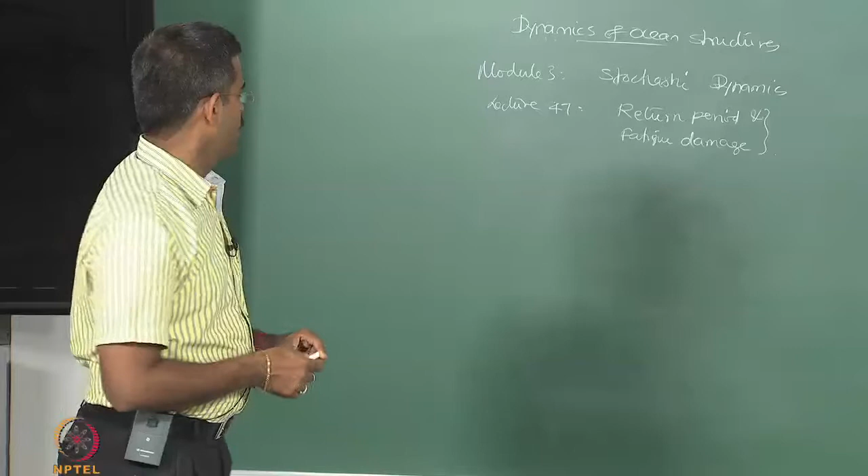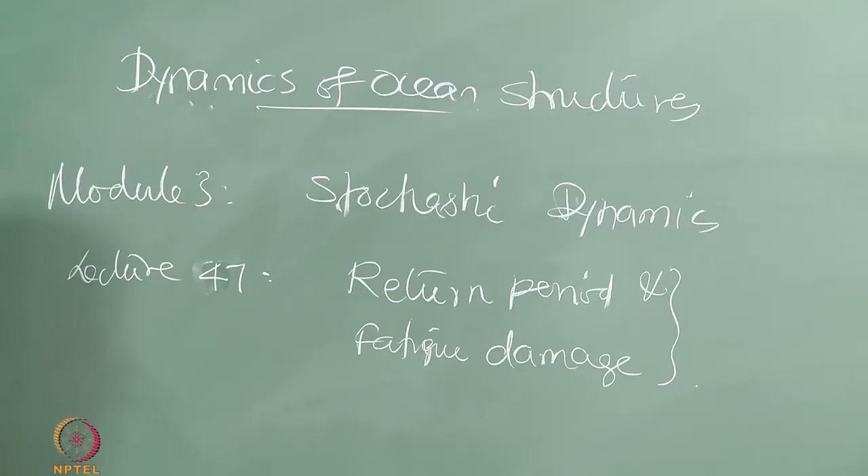So, we already discussed about the stochastic process, stationary conditions, ergodic, and the advantage of assuming the process to be ergodic. We have estimated the first order statistical properties for a stochastic process, and in the last class derived the connectivity between the load and the response, what we call a transfer function. We already said that the variance of the response is actually a function of the white noise, which is a modification of the input spectrum, which then depends essentially on

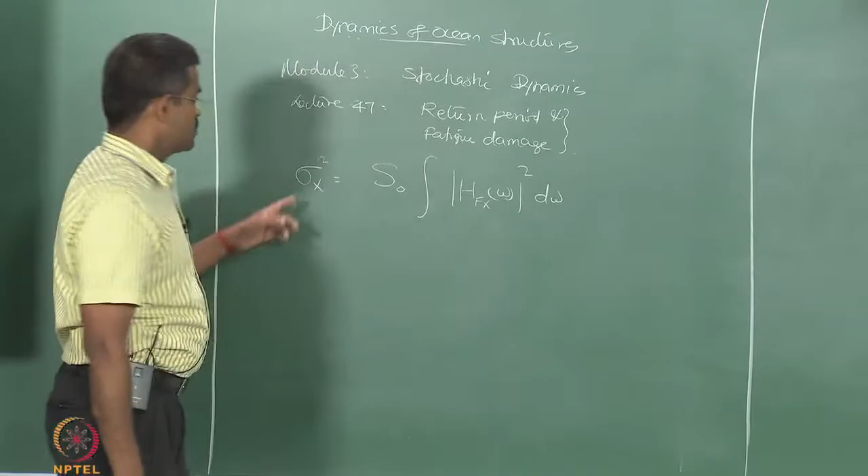a square d omega, and we already know that the response is a really narrow banded process for weakly damped system. For weakly damped system, response spectrum or response is narrow banded.

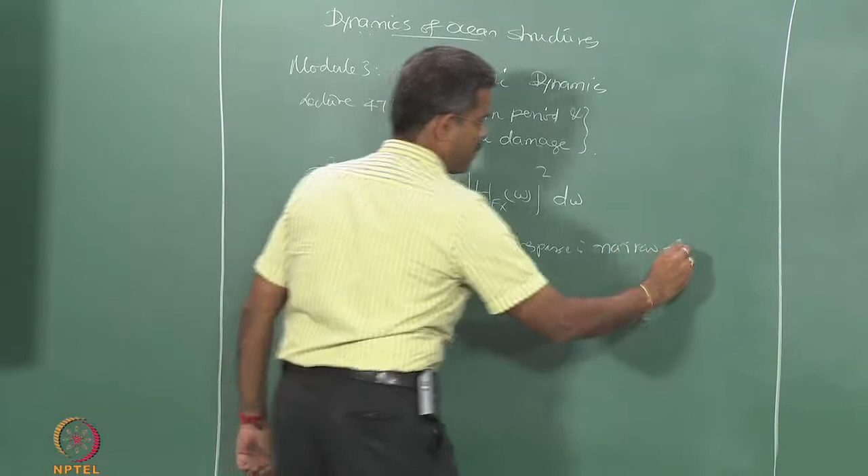It implies that it depends essentially on the transfer function, which depends on the ratio of omega, omega bar, and zeta, because transfer function is closely mapped to dynamic amplification factor, which is the ratio of the frequencies and the damping ratio in the given system.

So, essentially this conveys exactly the same meaning as that of a conventional dynamic analysis, where I do not bother about the statistical characteristics. I only bother about the input value in terms of its time history and try to find out the response either using modal response analysis, etc.

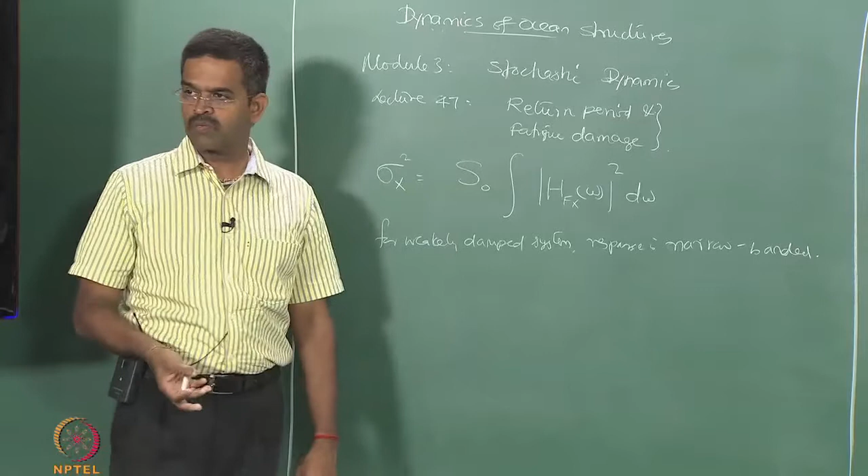I also have the similar meaning there, that the system response will be dependent essentially on the amplification factor of the system, which is a function of the ratio of the frequencies and damping present in the system. I also get exactly the same meaning in terms of physical understanding, even through a stochastic process, where we convey the same meaning, and we call this white noise approximation, where the input spectrum is modified, because the variation

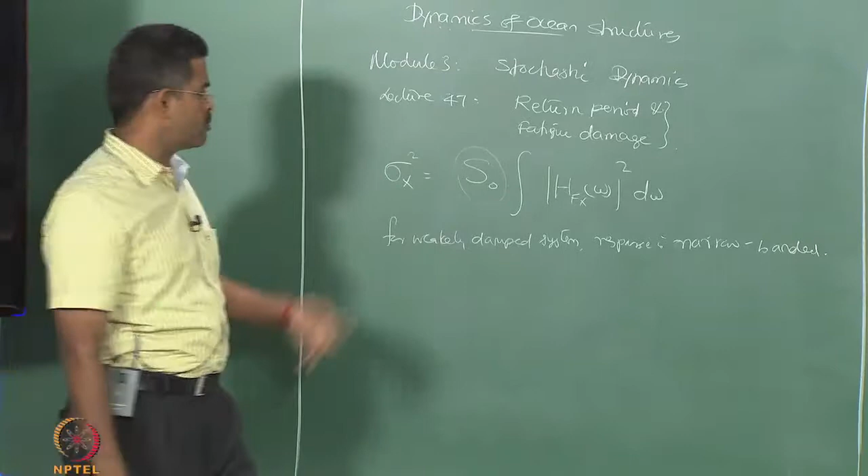of the input spectrum compared to that of the transfer function is not very sensitive. So, we capture the sensitivity of the transfer function and keep it out of the integral, and this integral is from 0 to infinity, or minus infinity to plus infinity, and so on. This is what we have discussed.

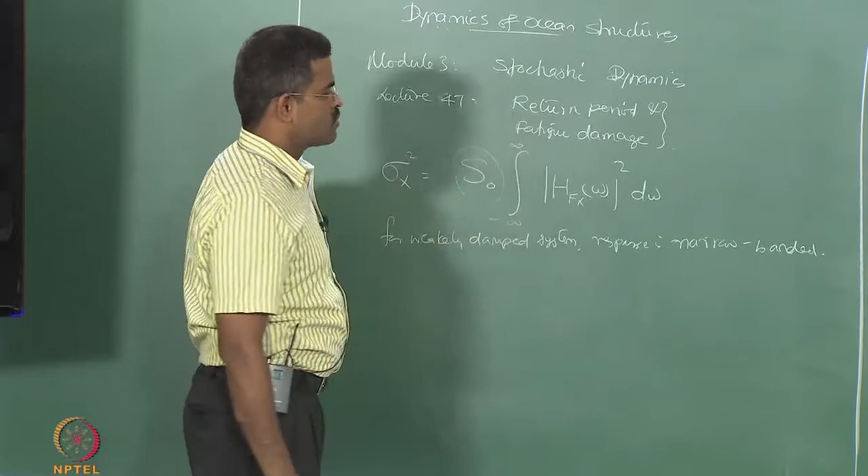Now, we will talk about the classical definition and understanding of return period. We already highlighted this partially in the first module, and we will recapture it again with the understanding of stochastic process. Then we will see how stochastic process can be useful for estimating the fatigue damage in a given system using linear approximation of cumulative damages.

Let us talk about return period now, because the moment I say return period, people have confusion about the reference period and return period. A lot of confusion is there. Return period can be expressed in three manners: one in the time domain manner, one in terms of the risk associated with return period, and the third could be a general definition of any value in a given set.

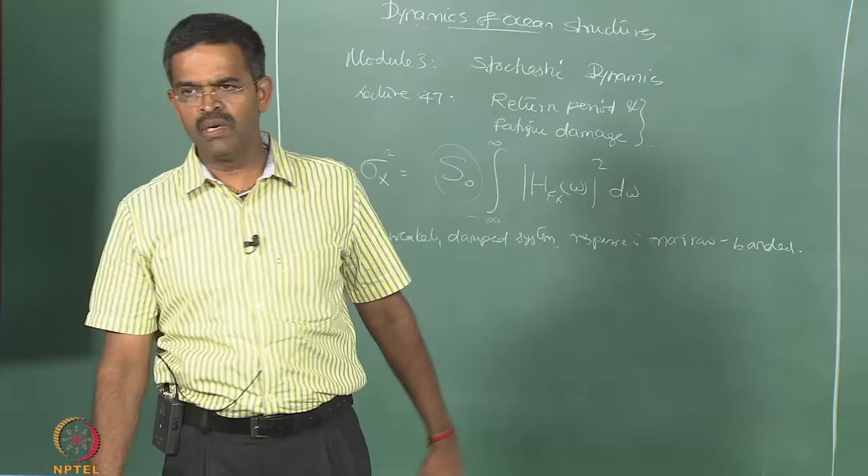Let Z be a random process. The random process, like we all understand, can be a wave height, wave period, stress value, bending moment, deflection, any value - let it be a random process. And I want to compare the value of Z of t with some threshold value small z, and I want to see what is the probability of exceedance of Z of t in a given set with that of small z. I want to see what is the probability of the value I am observing in a given system exceeding any pre-assigned, prefixed, predetermined value small z.

Then I will call that the period of exceedance. That is what we call the return period. Period of exceedance.

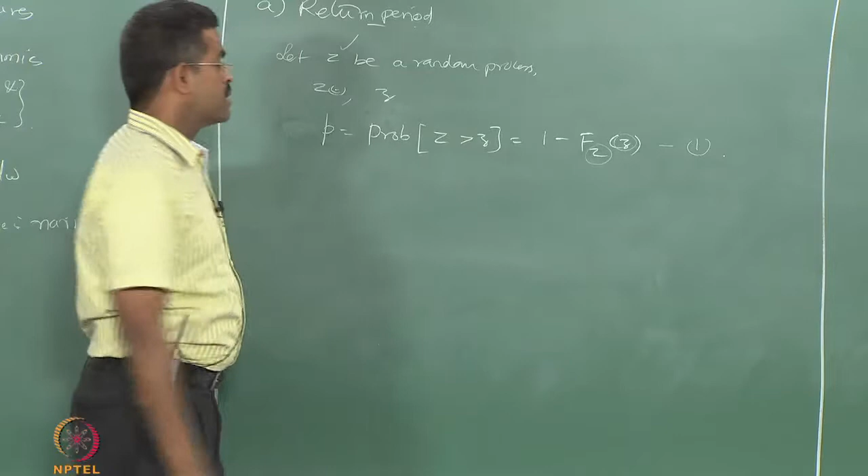Let that probability P be the probability of Z exceeding z, which is given by 1 minus F capital Z of z - that is the nomenclature. Z is the set of observation, z is the threshold value with which you are comparing. Equation number 1. So, the probability of exceedance of the value observed by you, which is actually a random process, by comparing it with some standard reference value - because when you say exceedance you have to compare it with some value. That comparison value is a fixed value, and you are observing a set of values which is randomly distributed, and the probability of that exceedance is expressed by this relationship.

Now, probability, or let us say exceedance of the observed value can be then stated as return period, which is R bar Z, which is 1 over the probability of this value, which is 1 by 1 minus F Z of z, equation 2. So, if you know this probability of exceedance, then you can easily find the return period, which is the inverse of this probability.

which is inverse of this, or inverse of this probability.

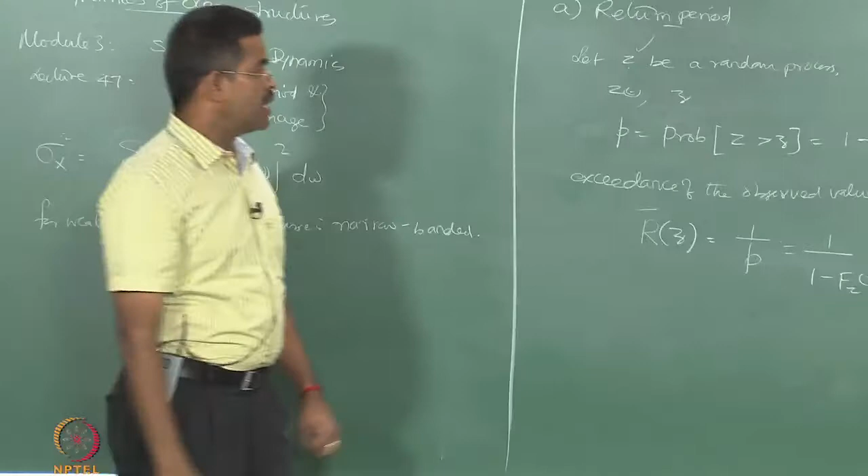Obviously, there is a very important factor here which people generally associate with return period. You have observed a set of values of z which is randomly distributed. There is a lot of uncertainty in recording z. One important factor associated with return period is at what intervals you have to record z, because the observation of z should be statistically independent.

So, to make any observation statistically independent, you have to have a sufficient delta t between the observations, where delta t is the interval between the successive observations, over a period of observation t. It is important to ensure that the interval between the observations should be sufficiently large to make the observations statistically independent.

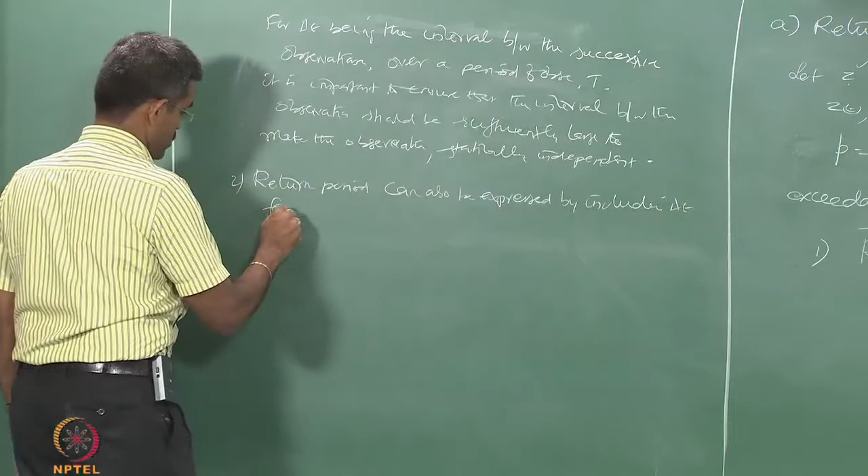So, in that case, the return period can be expressed. This is the second form of return period. The first form of return period is this one. Return period can also be expressed by including the delta t factor as given below.

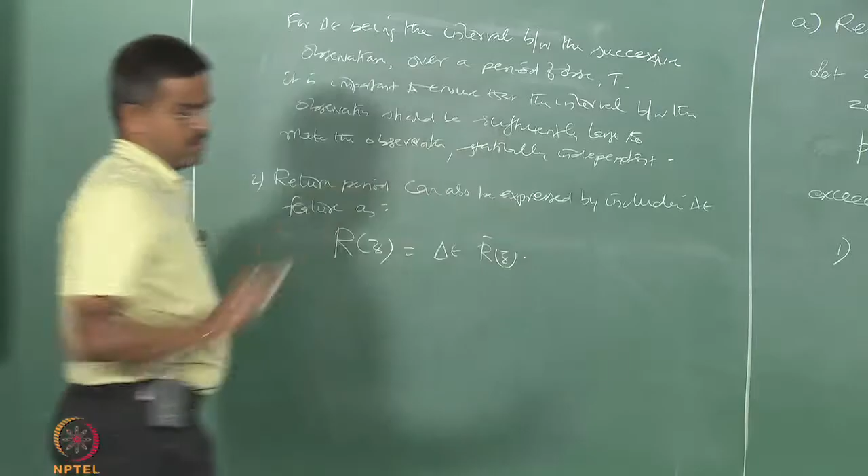So in this case we say that R of z, here it is R bar, here it is R, which is indicated as R bar delta t of z. I call this equation number 3. So this is also called return period, but this includes the feature of time interval between the observations.

Now we can also understand this with an example. Let us say in design of offshore structures, the design load, which is also a variable, is considered as a probable value of exceedance of 10 power minus 2 every year.

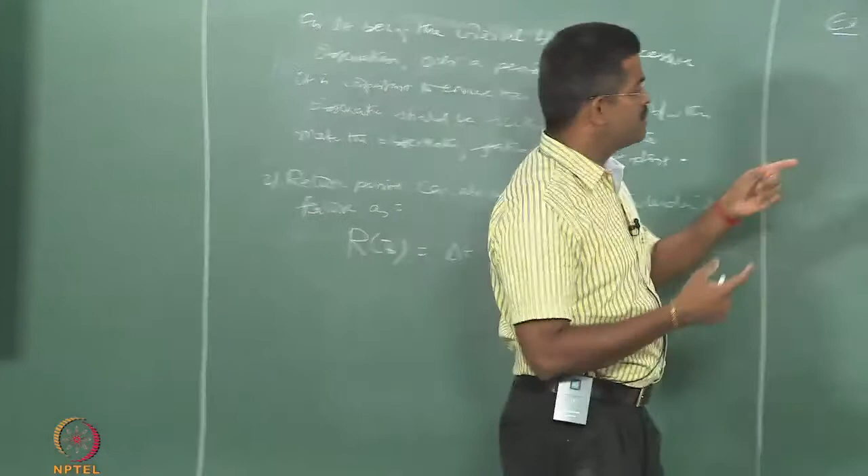What does it mean? 99% the design load what to apply to the design will not exceed. 0.01, 1% it will exceed, that is in every year. So there are two periods associated here. One, if we invert this, I get a probability, I get return period, because that is how we got the return period in the first definition. The other period which is associated with this is this. Now this is called the reference period.

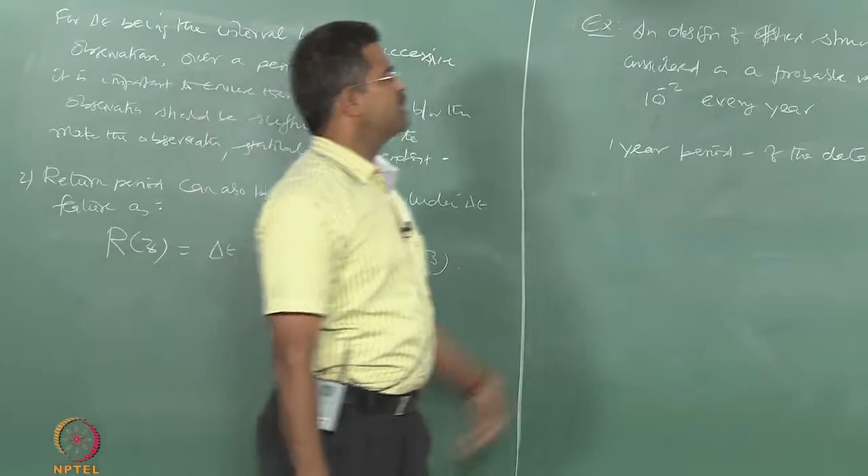And probability of exceedance of this will give me the return period. In my case, it is going to be that probability of the value, which is a variable, exceeding zeta - zeta is some threshold value of the design load, not the damping - which in my case is going to be 99% will not exceed. Now I have to define z.

Z is actually a design load, this is a threshold value, where z is going to be the maximum of, because I have to consider the maximum combination of the given loads, which is considered as the maximum combination from the given set of load f of t for any instantaneous time within a given reference period of 1 year. So that is the condition.

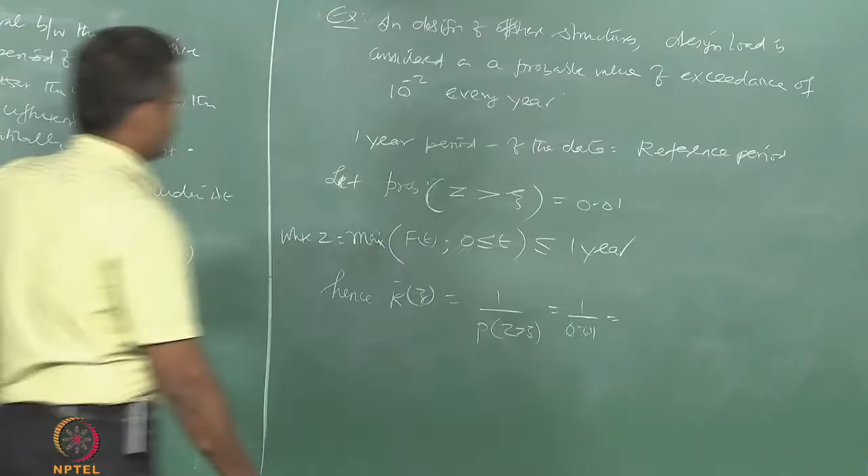Therefore, r bar of z, hence the return period r bar of z, will be 1 over probability of z exceeding zeta, which is 0.01, going to be 100 years. So that is how we calculate the return period. It is going to be 100 years. That is a simple example to illustrate how we can compute the return period and what is the difference between a reference period and return period.

Now we can also compute return period in terms of risk associated, because every load has got a risk. The moment I say the value will not exceed by 99%, now the counter question is, if we exceed by 1%, let us say the 1% exceedance is possible, what would be the level of risk if it exceeds? Because we are worried about safety ultimately, and safety and risk are complementary concepts. So return period can also be expressed in terms of risk associated with the process.

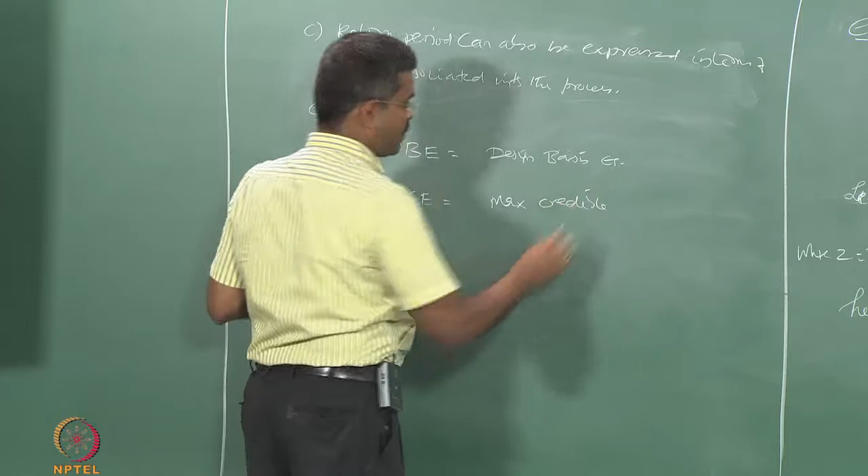For example, let us take earthquake. This earthquake is a loading process, which is a stochastic process. So there is something called design basis earthquake and maximum credible earthquake. There are two earthquakes used in the analysis: design basis earthquake, and maximum credible, further redefined also as maximum considered earthquake, but it is actually credible earthquake. Now they are given with respect to the risk associated. The design basis earthquake has got 10% risk occurring at 50 years, whereas the maximum credible earthquake has got 2% risk, or it is associated with 2% risk.

What does it mean? There is an input signal which you are going to consider for the design. If I want to call the input signal a design basis earthquake signal, then it has a probability of exceedance by 10% risk within 50 years. Whereas if you have a signal which I want to qualify as maximum credible earthquake, then the exceedance of that signal in my design life or given system is only 2%.

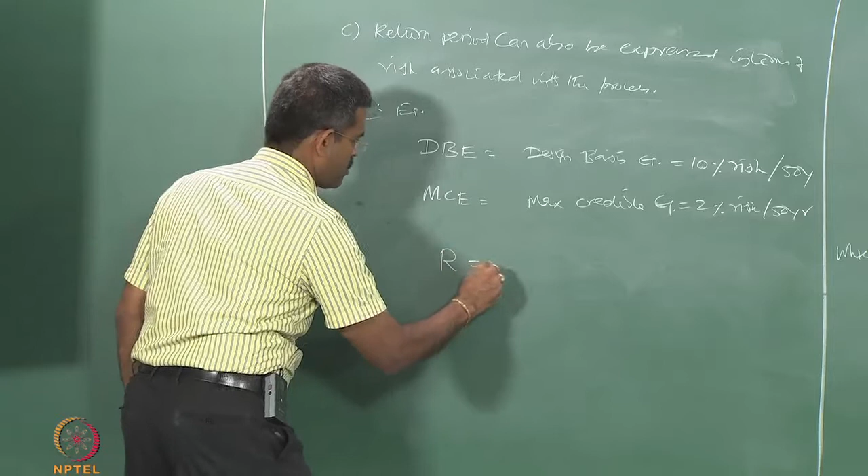Now I can compare these two and get back my return period using this equation. The risk associated is connected to the return period by a given expression, which is 1 minus (1 minus 1 over T) to the n. So let us say risk is 10%, that is 0.1, which is what I am looking for my DBE, design basis earthquake. So 1 minus 1 over t, t is the return period I do not know, whereas the reference years is 50. If you calculate t, you get T as 475 years.

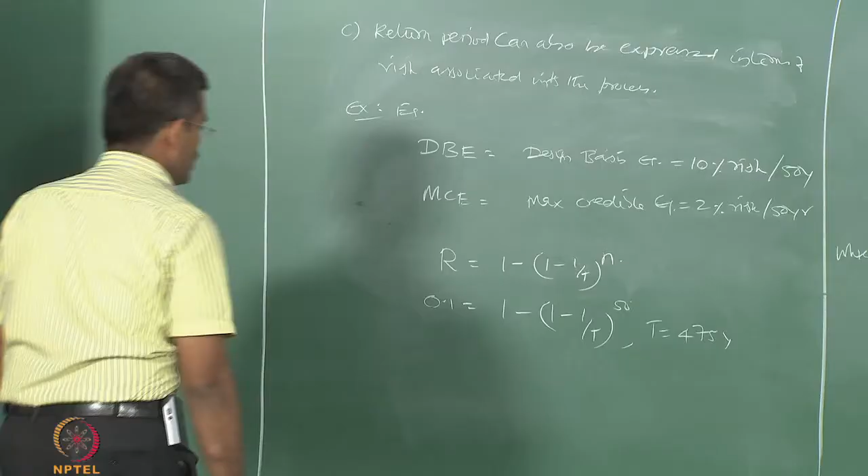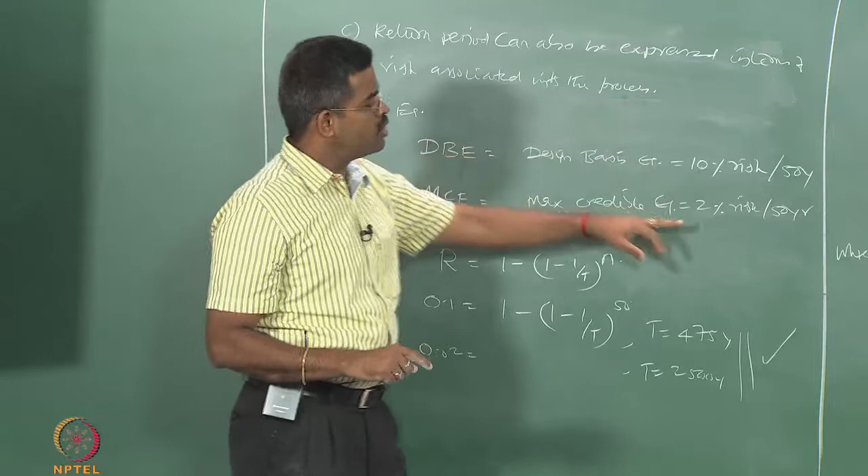Whereas when I substitute this risk as 0.02, for MCE, then I will get T as 2500 years. So this will now give you a comparatively physical picture of understanding: it is that earthquake which will be exceeded in its process, not in the system, by only 2%, which will reoccur once in 2500 years.

But that 2500th year can be this year also, where you are designing your platform. So you cannot say, since I am designing my platform today in 2015, my return period is 2500 years, therefore my service life is only 40 or 30 years, let me not bother. It is not talking about the design life of the structure, it is the return of the process. We really do not know when the last 2% exceedance occurred.

But if it had occurred, and if you know that, if you are alive during that time, you will be sure that only after 2500 years it will return. But since you do not know that, because the process is random, as I said, the random process value is fixed but you do not know the value, therefore it is random. So since it is a random process, that occurrence period can be this year where you have commissioned a platform, therefore risk is always there.

So risk, when associated with return period, will give you a fairly practical meaning of understanding the connectivity between the return period and risk, where n is a reference here. It means return period cannot be quantified in a given design if you do not have a reference period. So do not try to give a return period without a reference period, there is no meaning.

This is how return period is generally qualified in a stochastic process. The second topic is how this process can be used for fatigue damages. Why are we bothered about fatigue damages? Fatigue is a process where the amplitude is not exceeded instantaneously, so there is no damage caused by excessive amplitude.

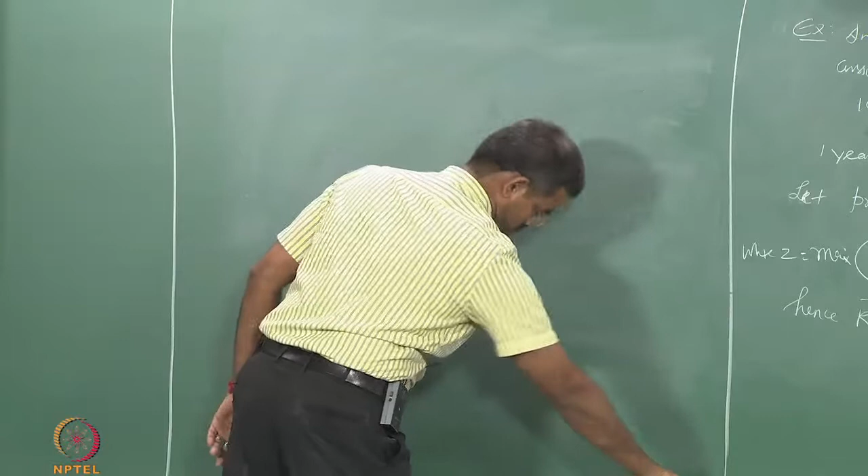The difficulty with fatigue is the amplitude is within the threshold value, but the number of cycles the material is subjected to has exceeded the threshold number. So the amplitude is very small, but you are doing that amplitude for n number of times. You are whispering in somebody's ear 1 million times a day, so he gets irritated. That irritation is the fatigue damage.

Whispering is a low decibel level, maybe 1 or 2 decibels, you are not disturbing anybody, you are simply whispering in his ear about 3-4 million times in a day. So he gets irritated. That is a damage caused to the ear, because the amplitude is so low, but the number of cycles the ear can sustain the whispering is very high phenomenally, therefore the ear gets damaged or the person gets impaired.

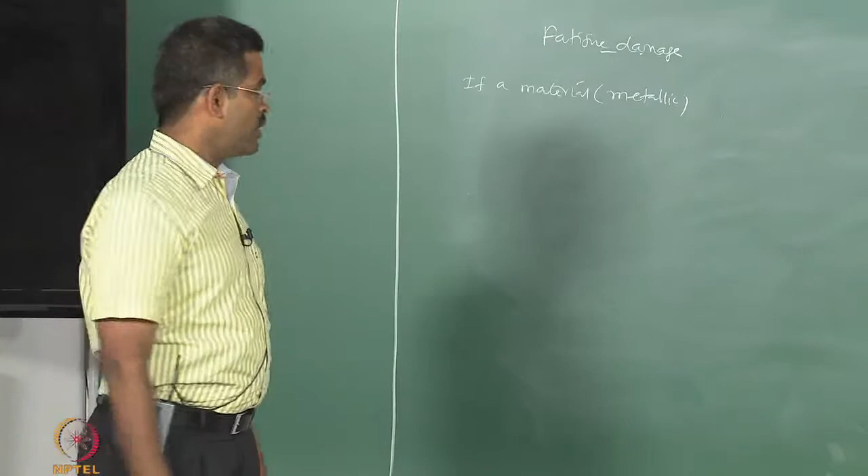So let us talk about fatigue damage. Fatigue damage can also be estimated using a stochastic process like this. Let us see how. Fatigue damage occurs in a material, essentially metallic - composites are not included in this. The material should have sustainability for reversal of loads. Not all materials have this. Your friend should be able to listen to you 1 million times; if he closes his ear, there is no fatigue. So the material should allow reversal of forces.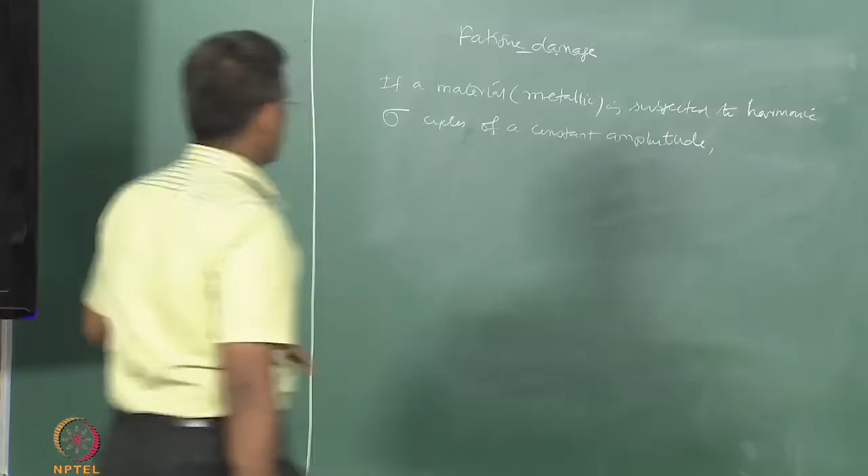Essentially, metallic materials unfortunately come with this inbuilt characteristic. So metallic material is subjected to harmonic stress cycles. Why is it harmonic? Harmonic has trough and crest - harmonic stress cycles. If a material is subjected to harmonic stress cycles of a constant amplitude which is larger than a certain acceptable value...

What otherwise we call threshold value, we can always say this as magnitude. Value does not make any meaning, because I am talking about the stress, I should talk about the amplitude.

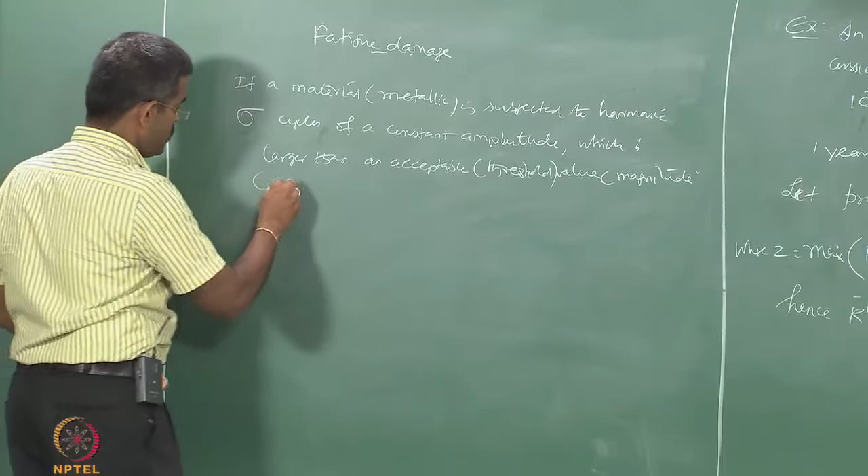Now one can ask me a question, how will you decide what is the acceptable magnitude of stress value? This is material dependent. How can you compare this? For example, you are whispering in the ears of A and ears of B. A can sustain 1 million cycles, B will not sustain even one more. The reaction of A and B to the same whispering decibel, same number of cycles, same amplitude, is different, because material characteristics of A and B are different. So it is material dependent.

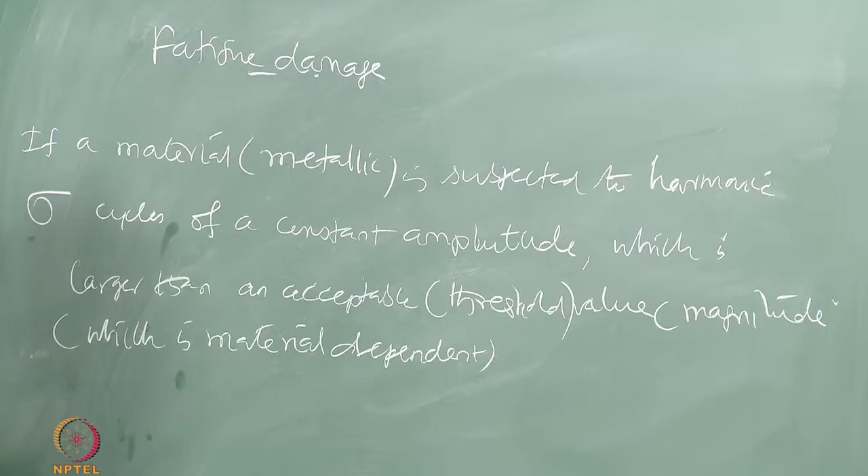Can cause fatigue damage. If a material value subject to harmonic loading is exceeded, it can result in fatigue damage.

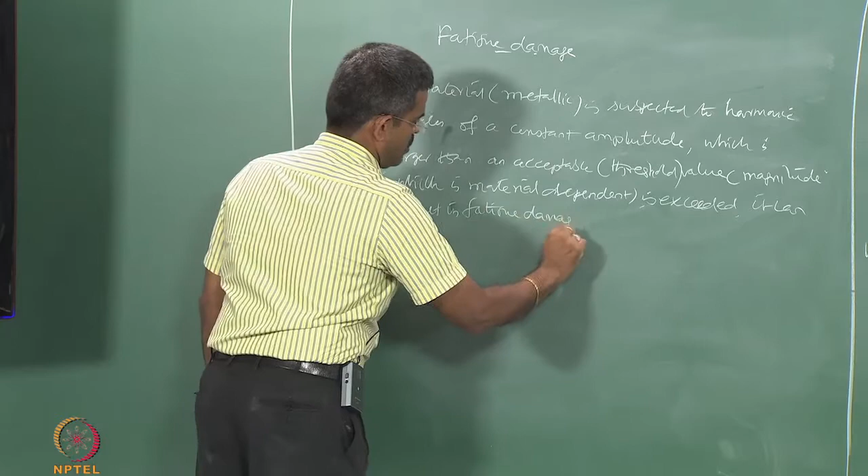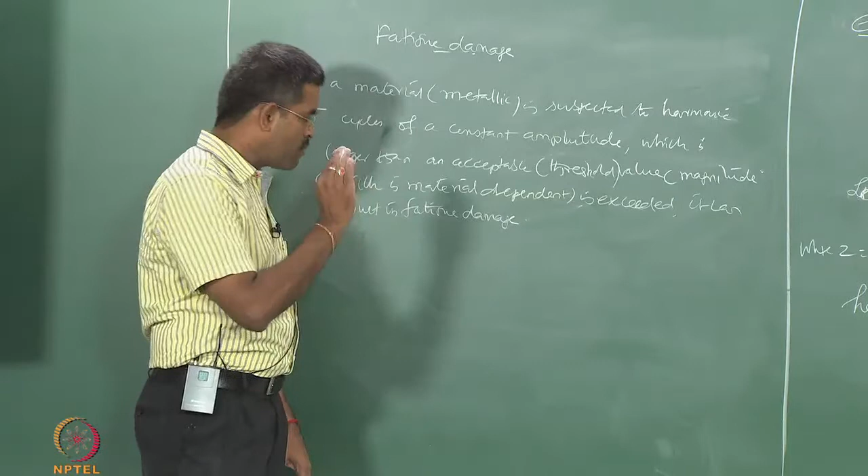Interestingly, there is a very fundamental characteristic about fatigue damage. People talk about fracture mechanics, where they discuss fatigue and fracture in detail. We are not touching that, because we are doing fatigue discussion only for about 15 minutes. It is very difficult to qualify an understanding of fatigue damages and fatigue responses in just 15 minutes, but since I am interested to touch upon this topic, which is one of the important areas in stochastic process, I will touch upon this.

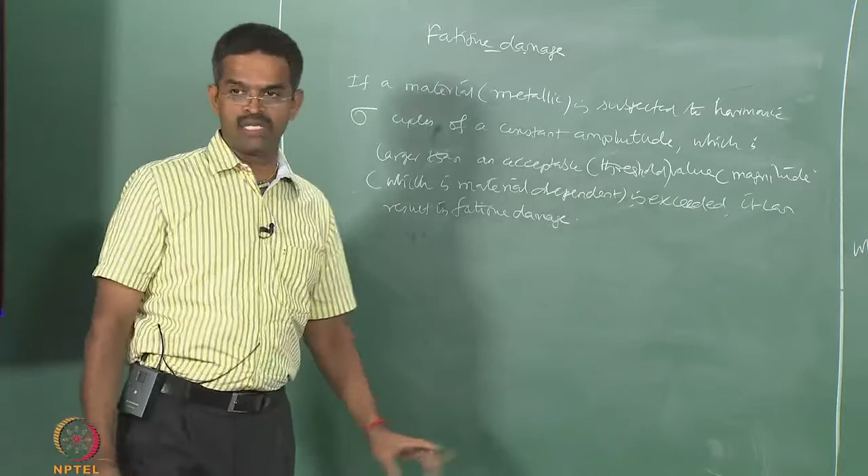An important characteristic of fatigue damage is that the damage is always cumulative. It is irreversible and cumulative, that is the problem. Every fatigue damage has to be computed as cumulative, because the fatigue damage being a low amplitude value, it does not demand irreversibility, since the damage does not occur actually. It is always cumulative, and that is a very serious problem here. Most of the successful models where people use fatigue damage estimates are linear.

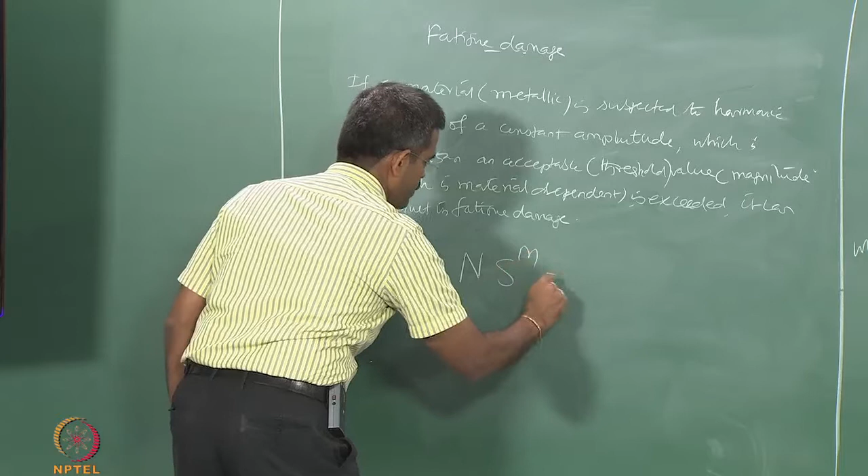I will talk about these two points now. So one is the cumulative one. Now let us say how to compute this; it is given by a simple relationship, N times S power m equals k. I call this equation number 1, where m and k are constants depending upon the material and type of loading. M is usually a value of 3 to 5, a simple number.

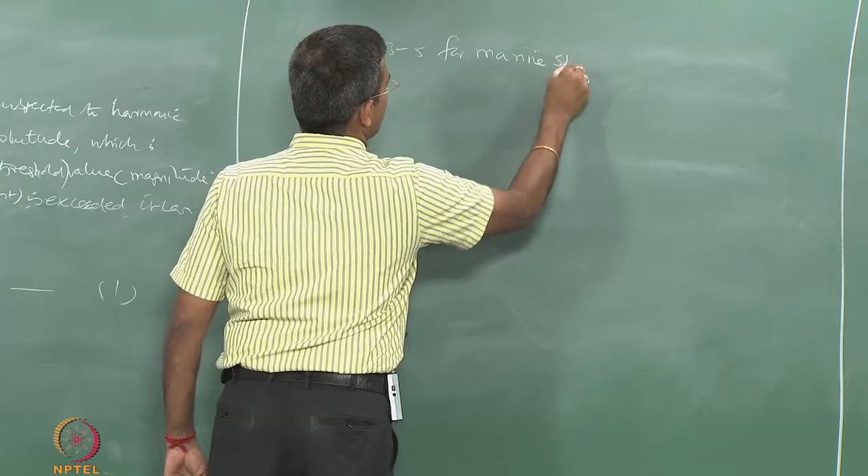I am worried only about the material steel, sorry, marine steel. It's 3 to 5. It's not the same number for all materials, it varies. N denotes the number of cycles to fracture. So let us be very specific, number of stress cycles, we are talking about the stress magnitude here.

Of course, as I said, you have to fix up a threshold value. So S denotes the stress range. These are all stress symbols, do not write the other symbol, it is stress value. Otherwise you will read this as range and get completely confused. I think you are clear with this notation, stress. I am avoiding writing the word, I am writing the stress value.

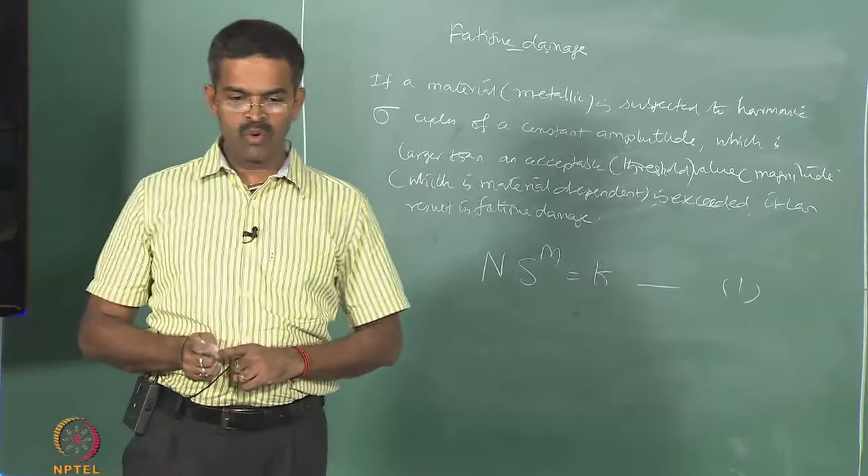So why are we talking about range in stochastic dynamics? You cannot always qualify an exceedance by a single number. Why? Because the whole process is random. You have to give a range. The moment I say a range, it is always a range width or band, so from that, plus and minus. So S minus A and plus A, the range is 2A, that is how we fix up the range. It is always the other way.

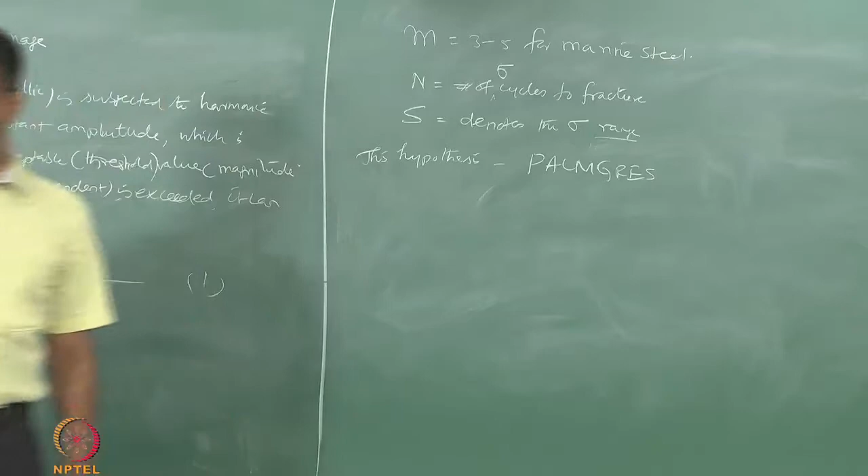This hypothesis was suggested by Palmgren and Miner, called Miner's rule.

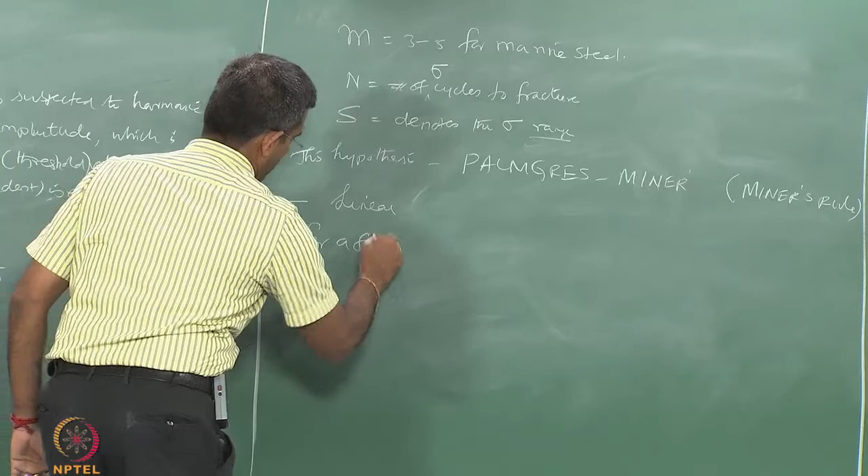In fatigue estimates, this assumes the damage remains linear. So for a given loading history, that is the important input you need. You may ask me why this input is required. If you do not have the loading history, you cannot calculate the threshold range of stress value, that's number 1. Number 2, from the loading history you will know how many times it is exceeded and not exceeded. So you have to have the history. The moment you talk about history, I must always have a period for a given loading history, period T, because I cannot consider infinite history.

Cumulative fatigue damage, which is d tilde t, is given by...

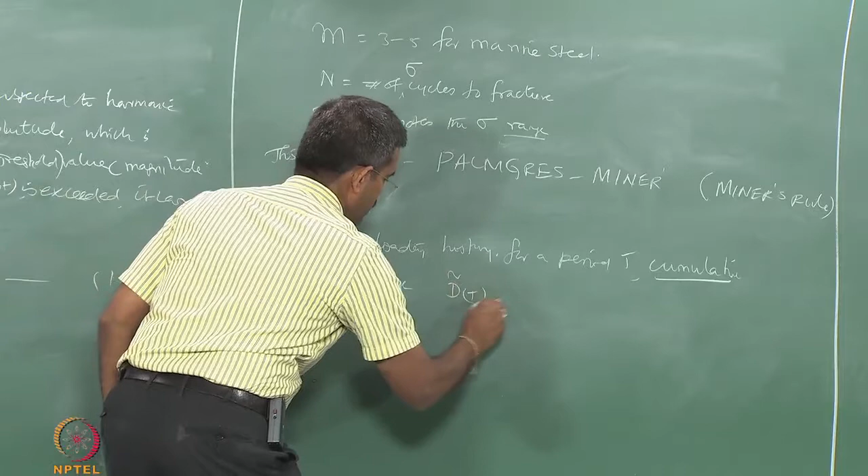small nj by capital Nj, where small nj is the number of stress cycles in the time history associated within the stress range. We are not bothered about the value of stress values beyond the stress range, only in the stress range the number of cycles associated we are interested. This is not 6, this is again stress cycles associated.

Capital Nj is the number of stress cycles leading to fracture, which is given by a simple expression, k Sj to the power minus m. Okay, we got it from equation 1, I just reversed it.

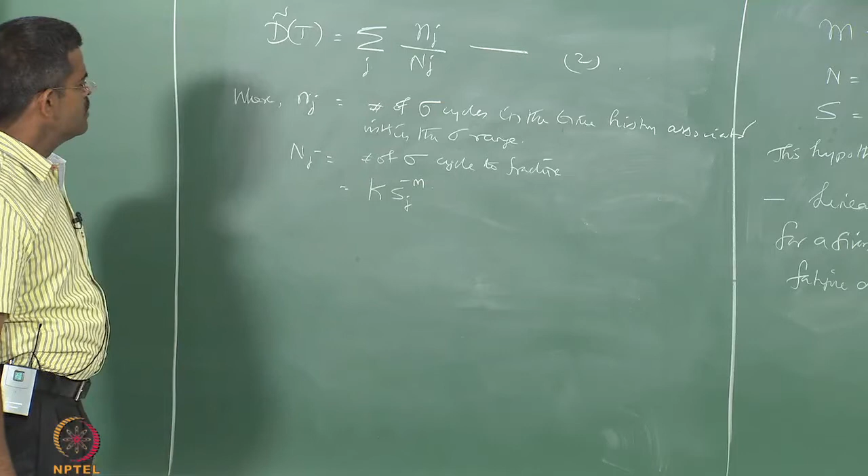So, the cumulative damage or the damage occurs when d tilde is 1. When it occurs, damage is caused, for d tilde equals 1.

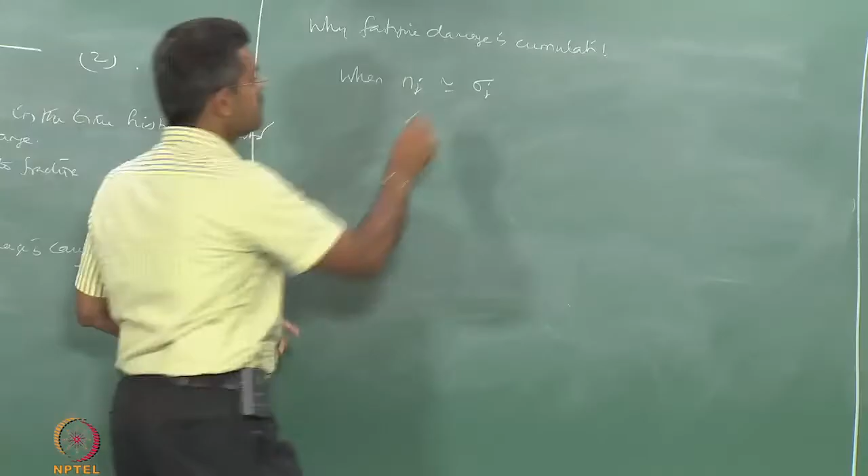Now, one can ask a very interesting question: why fatigue damages are cumulative in nature? Why fatigue damage is cumulative? Why should I consider cumulative effect? Because when nj, maybe one of the elements of the capital J's, is more or less equal to the exceedance of stress value within the given range, it eats away the lifetime of the structure.

Physical example: one cigar smoked has eaten away, for example, 30 seconds of your life. So 2 cigars, already 1 minute is gone, the second cigar again 30 seconds. So it is cumulative damage. Though smoking one cigar alone will not cause a fatal effect, stress exceedance is there, but it is within the threshold value, so the effect is not visualized by the human being. When you keep on smoking continuous cigarettes, you might say today I smoked only 5, but the doctor would say you have smoked 3500 cigarettes earlier, therefore the lung is spoiled. So cumulative damage: the threshold value is exceeded cumulatively because it eats away the lifetime of the structure, or the human being parallelly. Exactly, that is why the damage in fatigue is cumulative.

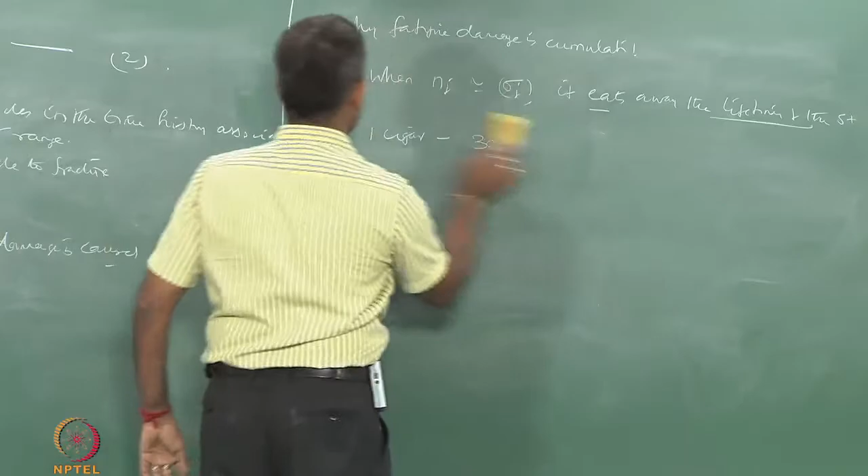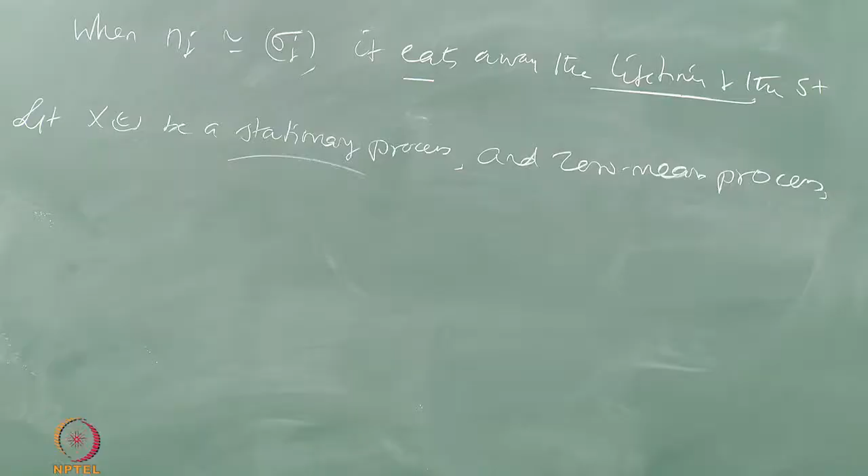So let us take a stationary process x of t. Let x of t be a stationary process, because when we wrote this sentence for the first time in the stochastic dynamics class, we were worried about what a stationary process actually is, whether it is the same kind of stationary we think of elsewhere. Now we really know what we mean by a stationary process, because we have a lot of information about that, so we know it is a stationary process and a zero mean process. I can add more complication to this because we are all experts in what a zero mean process is. Zero mean and narrow banded, all of this will happen because we already know these things occur in a given system process.

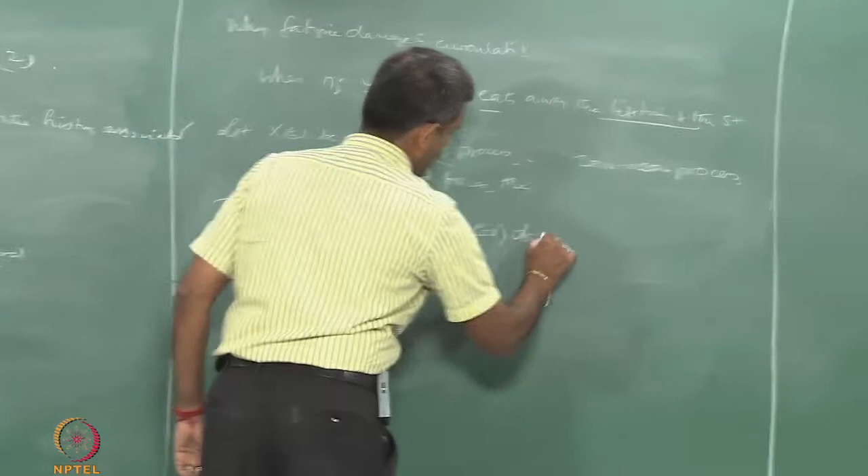Then the cumulative—actually the literature uses a different word, they say accumulated, that is what the literature says. For me, I understand easily this word cumulative. Accumulated damage d tilde t for this case will be given by, over a stress range A, it is a continuous variation, n tilde A by threshold value N of A, dA. This is equation number 3.

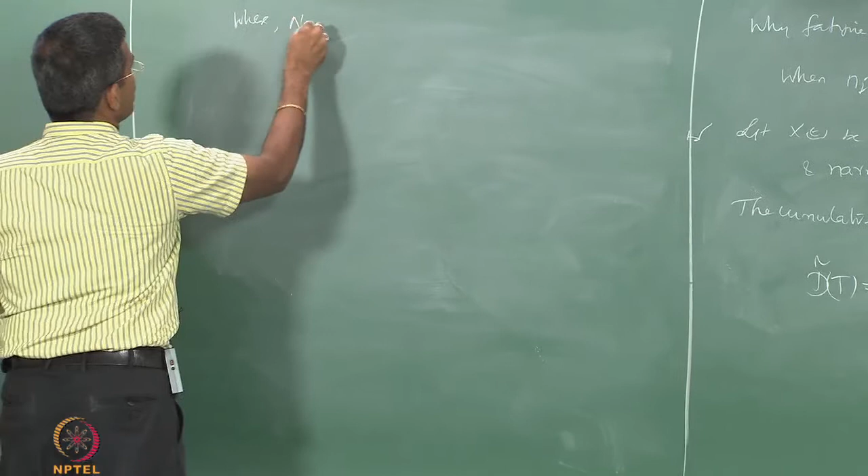The denominator N of A, where N of A can be given by the equation which we already know, which is k times the stress range to the power minus m. Why am I putting 2a here? Because the stress value is n plus and minus a, I get 2a. Because in this equation I must put the full range, okay, 2a to the minus m, and m is a material property.

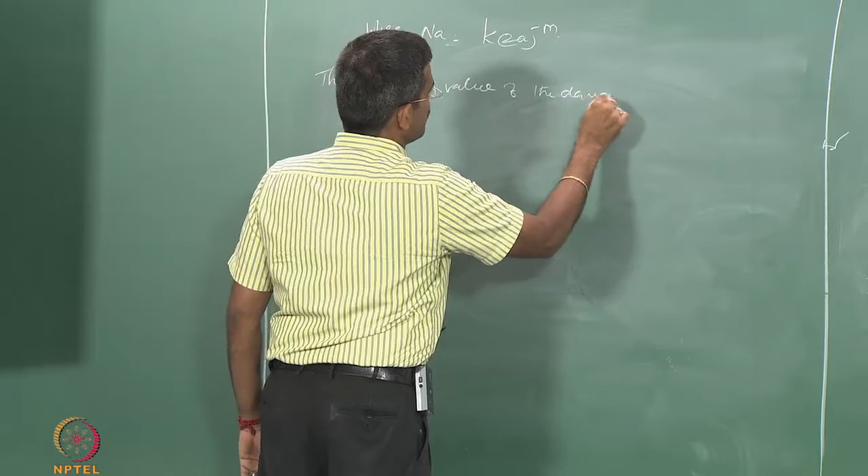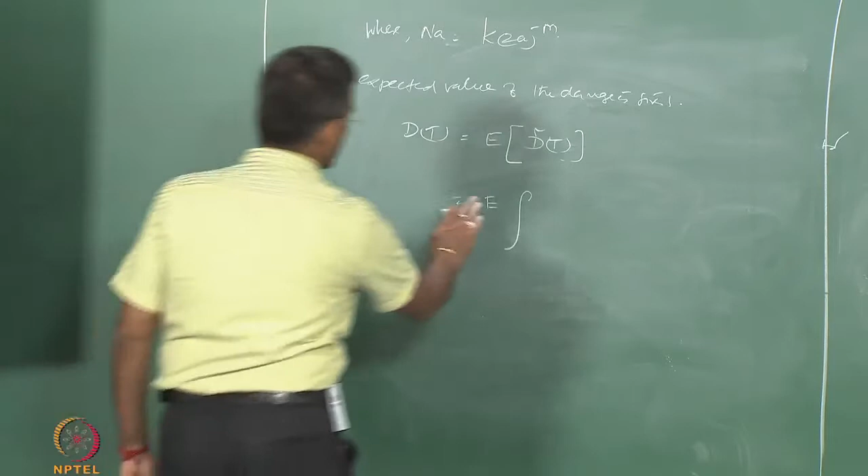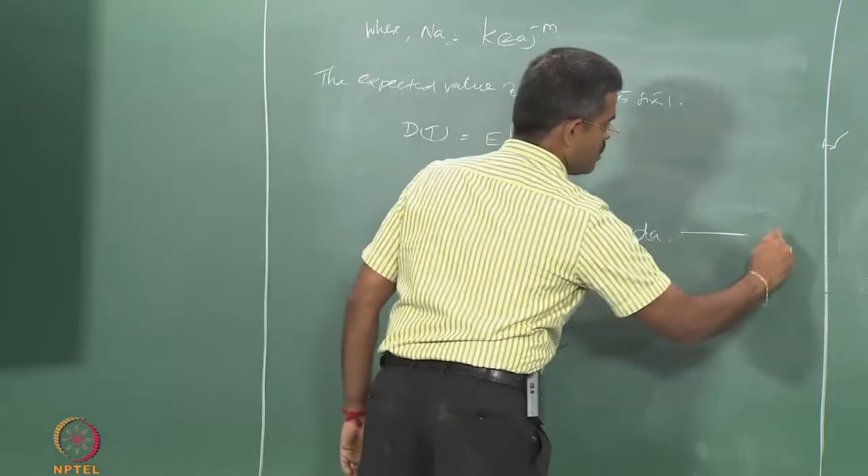Now the expected value—this is where I am moving to stochastics. The expected value, because always I am looking for a mean value. So the moment I say expected value of the damage, it is given by d of t, which is the expected value of d tilde t, which is the expected value of N(A)dA. This is equation 4. Of course this goes from 0 to infinity, because the mean is only the positive response of the system.

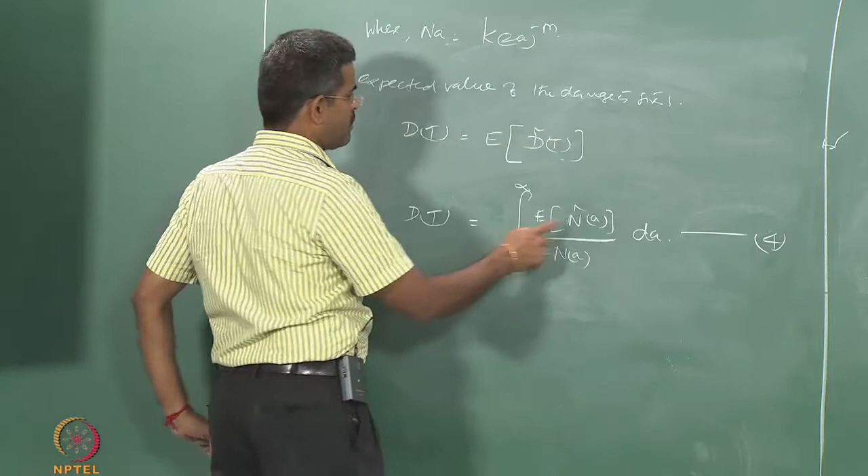Now here we are worried about the expected damage, which is n hat, the actually observed value. So this can be computed for a given von Mises stress failure criterion. There are different kinds of stress theories available in the literature; von Mises stress theory is one which is popularly used for fatigue damage estimates.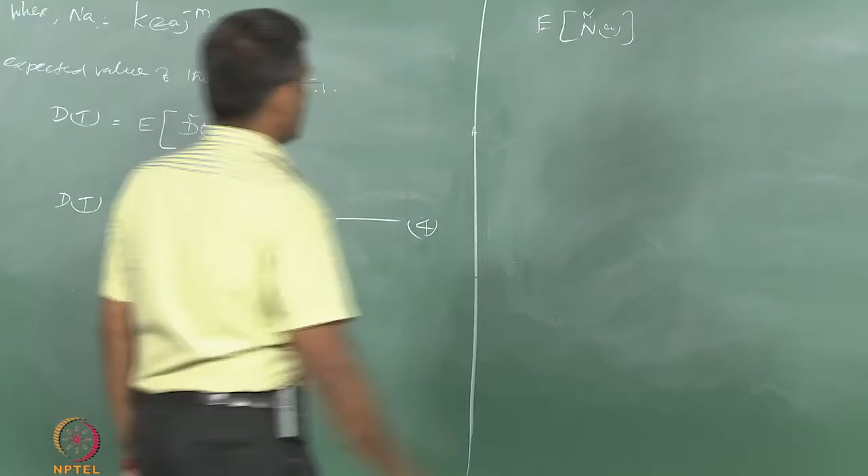So we are talking about the expected value of n hat or n tilde of A, which is easily given by the multiplier of the response amplitude function and the probability density function, which we already had in the first lecture of stochastics. So I am replacing it with a different symbol: Vx0 of t—they are not multipliers, they are actually one term, okay, Vx0 of t, only the positive value, times f of xp, a, d.

f of xp a, or f of xp a, is actually the relative peaks with amplitude, where p stands for that peak value in x, x being a stationary process. So it is the relative number of peaks with amplitude a, and of course there is a range, with amplitude a and a plus dA, an increment in a.

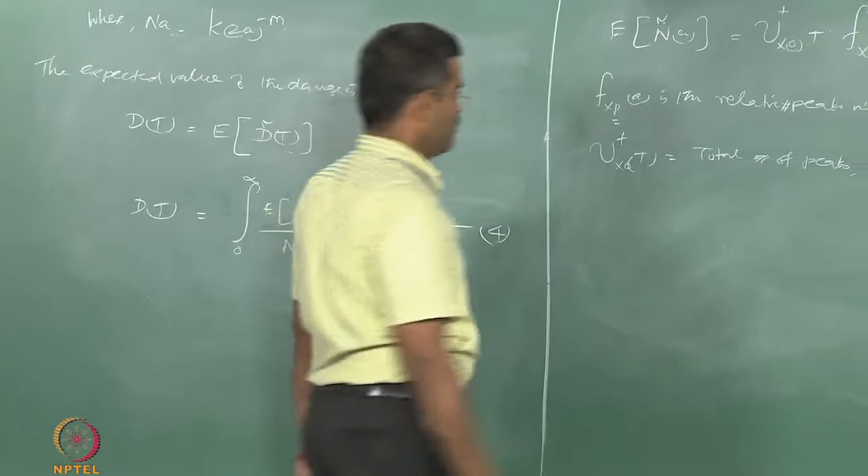Whereas Vx naught t is actually the total number of peaks, which is equal to the number of cycles, because it is going to be the same. You can either count the peak exceedance or the number of times it has exceeded, it is one and the same. For a given threshold value, whether you count the value exceeded or the number of times exceeded, you practically get the same number, which is the same as the equal number of cycles exceeded within t, because we have to look at the window of capital T.

Now d of t can be given as, because I have the expected value of n hat expression here, I can substitute this back. So this is going to be a constant total number. So V x0 t times the integral, because I have an integrated function, integral fxpa from 0 to infinity, fxpa dA by n of a.

And already we have an expression for N(a). You can substitute that back here. Therefore that will become Vx0 t, 2am by k, fxpa d.

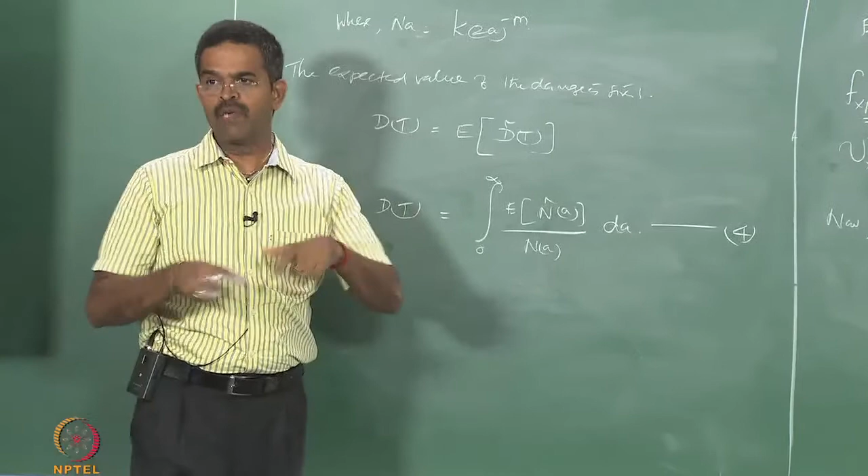Now, for a narrow banded process, already we said that x of t is a stationary narrow banded process. For a narrow banded process, it is generally Gaussian distributed. Hence, for a Gaussian process,

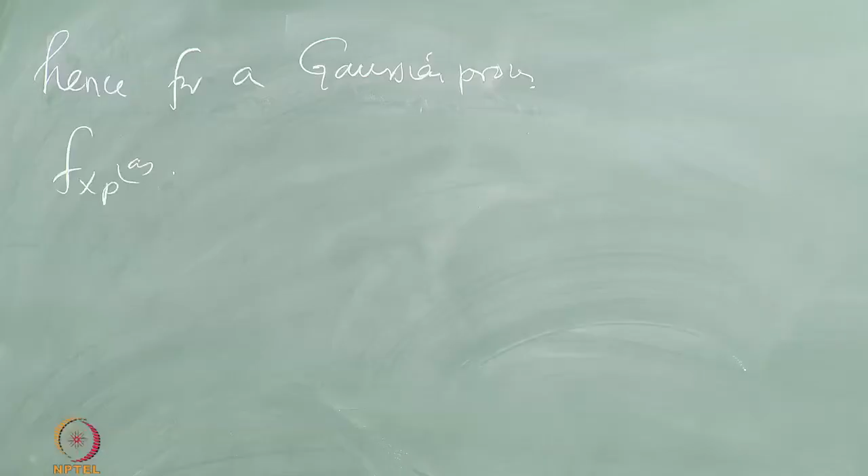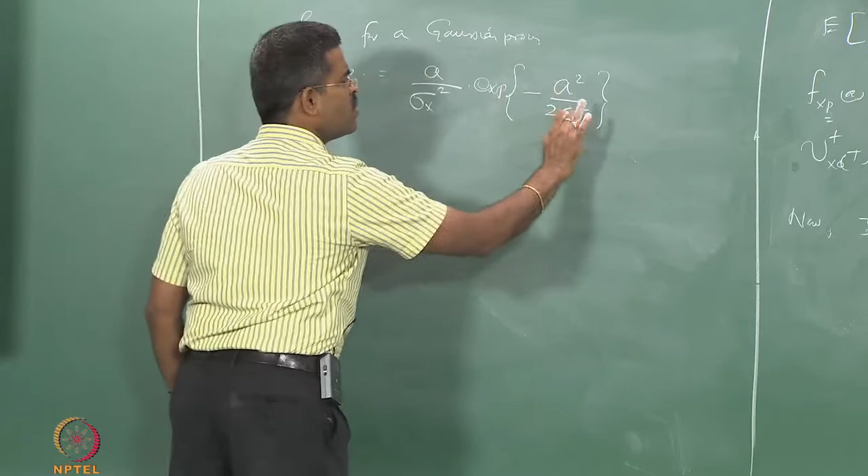the probability density function fx of p a can be given by a standard expression available in the literature, which can be given by a by sigma x square, the variance, exponential, e power minus a square by 2 sigma x square. I'll call this equation, I don't know if I've left one at 5 somewhere, so this is going to be 6.

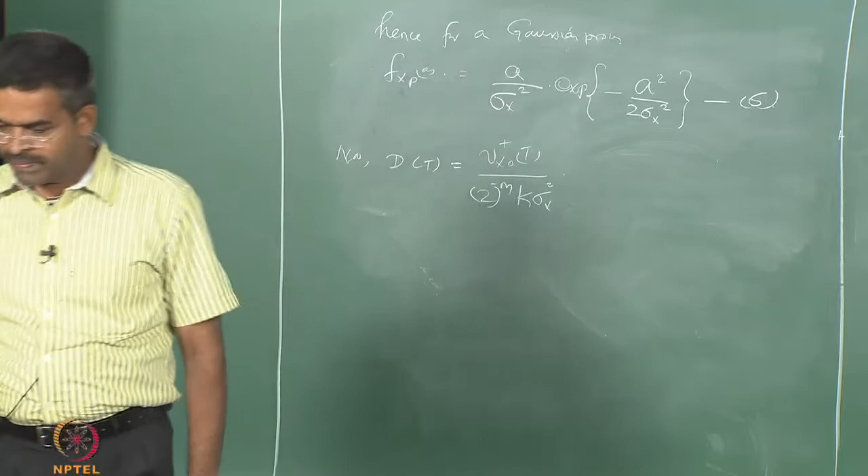So now substitute back this PDF into equation d of t and get d of t back. So d of t, which is a cumulative damage estimate, I will write the expression in short form: Vx0 plus t, 2 to minus m, k sigma x square, integration 0 to infinity, a^(m plus 1). Now there is one a here, one 2m here, am plus 1, exponential of this function, this is one and the same.

Now this integral is a standard integral against dA, which can be evaluated as a gamma function. So I write that value here: Vx naught t plus by k, 2 root 2 sigma x, 2 root 2 sigma x to the power m, gamma function, 1 plus m by 2. M is a material property.

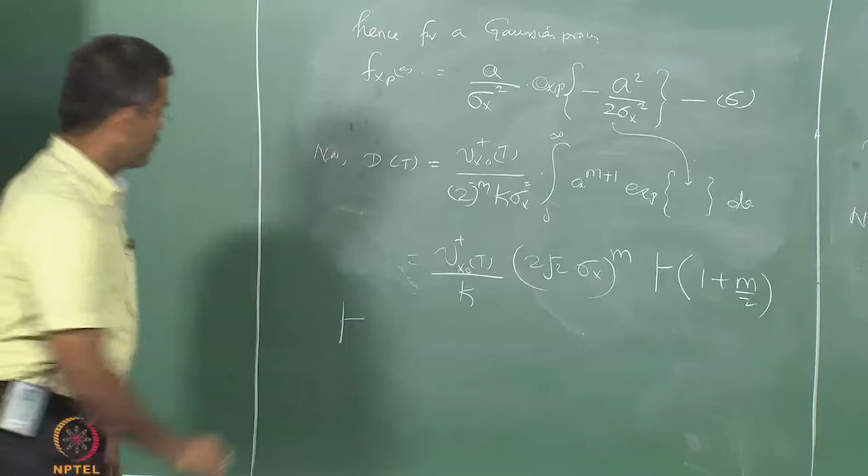Now for our understanding, as good engineers and mathematicians, the gamma function of n, any variable n, or let's be specific, n plus 1, because we have a function like this, is nothing but factorial n. For n equals, is it going to be 0? No, 0, 1, 2, that's a standard function available in mathematics. So gamma n plus 1. So if I know the value of m, I can estimate this.

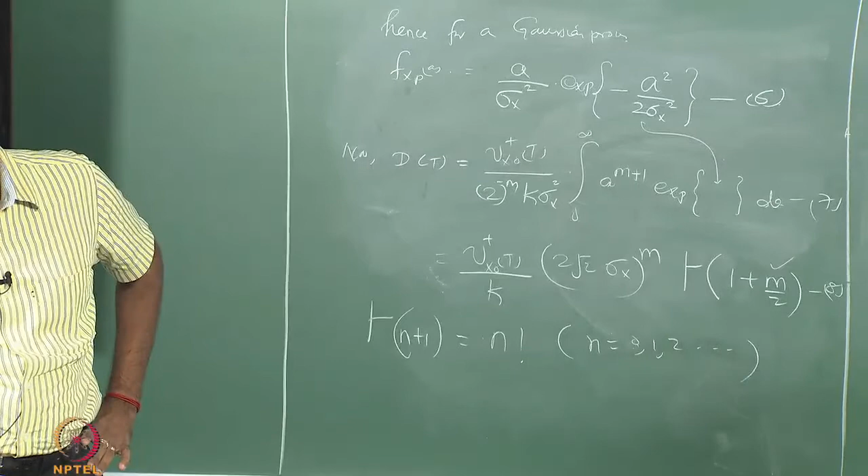Now I will call this equation number, let's say this is 7 and this is 8. One is not just interested in estimating the damage or cumulative damage. Ultimately, if the structure is getting cumulatively damaged - if a person is smoking cigarettes continuously, what is the lifetime of the person? So, the lifetime estimate.

Because we know that to get the lifetime estimate, damage must have occurred. So I must say d of t is 1, damage has occurred. So substituting d of t as 1 in equation 8, t can be estimated by setting d of t as 1 in equation 8. If I do that, I will get t, there is no bracket here, okay, t as k...

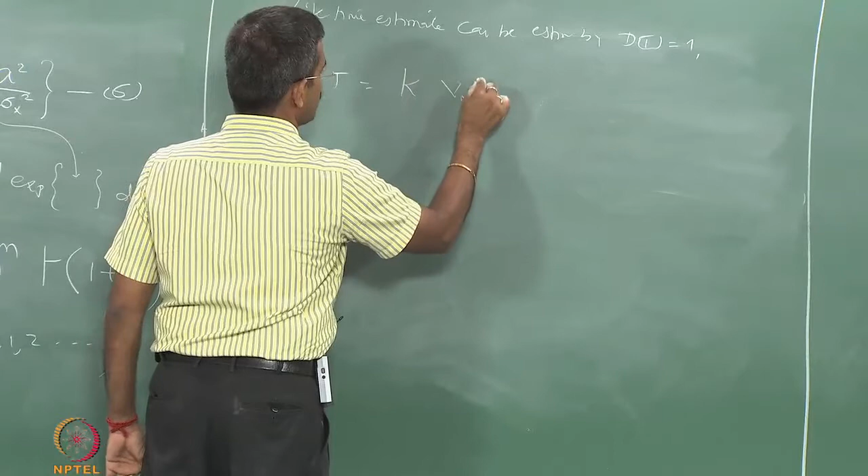Vx0 inverse, 2 sigma, 2 root 2 sigma x to the power m, by the gamma function.

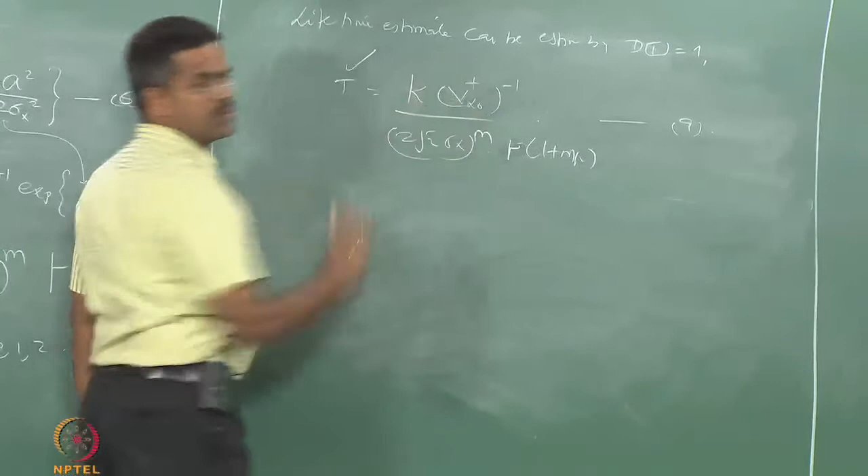So, I get the lifetime estimate, call it equation number 9. One can get the lifetime estimate if you know this. Now, interestingly, it is very difficult for us to compute Vx0 for a given system. So, Vx0 can be comparable to the 0 mean crossing period in a stochastic process, which is known as Tz in the literature.

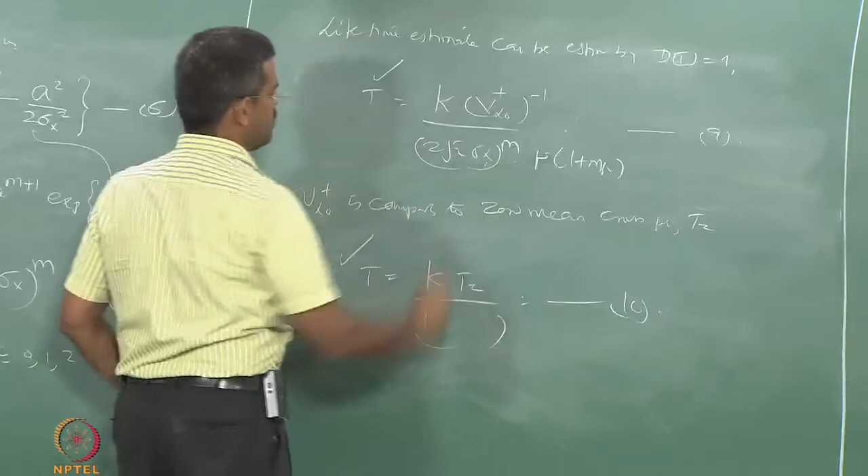Therefore, T is nothing but k times Tz, equation 10, and I get the lifetime estimate. So, I can use stochastic process to estimate fatigue damages also using Miner's rule or this kind of relationship, where I know all of them because I know the variation of the process, the standard deviation, I know the material characteristic. There is a material property again, type of loading, k is known to me. Tz is of course a count available from the stationary process, so one can easily find the lifetime estimate from this.

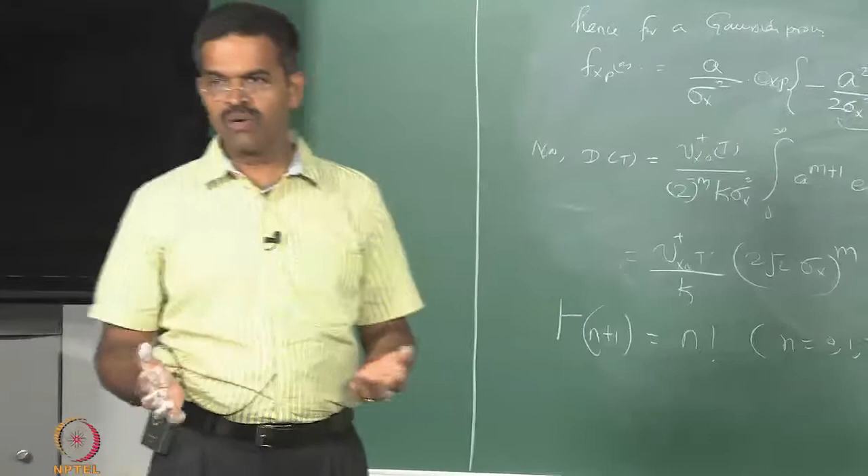So, these lectures of 4 to 5 lectures in stochastic dynamics have given you an introduction to how dynamics can be done, even though people claim that the given input loading is not defined, it is not well prescribed, and people say the variation in wave heights is so high it cannot be considered a random stationary process.

There are arguments. They can be considered a stationary process if you take long term statistics, okay, they can be called a stationary process. So, there are arguments both plus and minus. So, stochastic dynamics is on the verge of, let us say, research application in the offshore industry.

Okay. So, we have completed all the 3 modules now. In module 1 we talked about introduction to dynamics, we moved on further from single degree to multi degree, we solved problems with 4 and 5 degrees of freedom here. Then in the second module we applied the dynamics understanding to FSI, fluid structure interaction.

We picked up various generic modules, then we picked up specific examples of offshore platforms, we derived the complete equation of motion terminologies, we discussed at length the damping properties, different varieties of damping, and we did a lot of numerical examples to understand structural dynamics in terms of fundamental applications and appreciation.

Then we moved on to a higher end understanding of dynamics using stochastic theories or stochastic process, which is also one of the methods of appreciating this. We have discussed time domain solutions, iterative frequency domain solutions, and the transfer function approach which can be used for frequency domain approaches, etc.

So, we have discussed the Newmark's beta algorithm, solved examples, and given research papers for reference to read, and we have made a one-to-one correspondence of what has been published in the paper, what experiments have been done, what numerical studies have been established, how they are connected in newly generated software structures at IIT Madras, where we did a lot of experiments and new forms of offshore platforms, which has also been told.

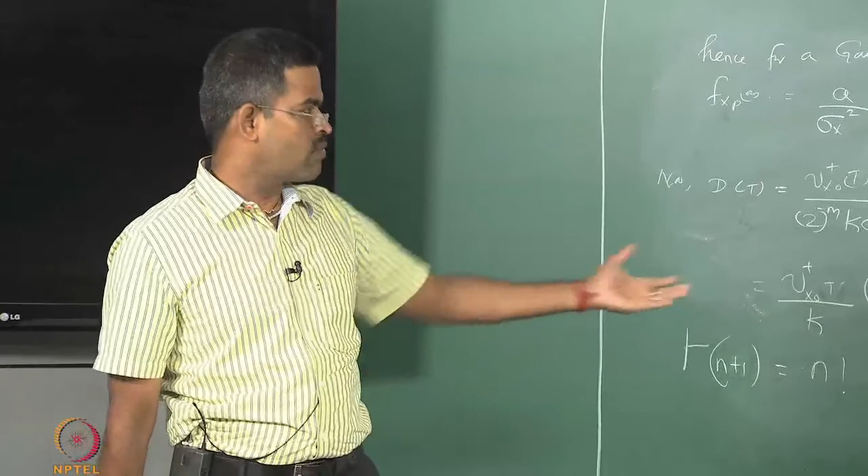I think I am very confident that whatever lectures were given, turning back again and looking at this, we have got about 2 books authored at IIT Madras on this area. There are many courses available, many textbooks available on structural dynamics, many authors have contributed, all of them equally important. We have referred more than 85 papers on the NPTEL website, all papers, all books, all notes, all will converge to a single understanding of enhancing confidence in dynamics.

If that is the achievement what we are able to do at the end of the course, I think we have done our job. Okay? Thank you very much.